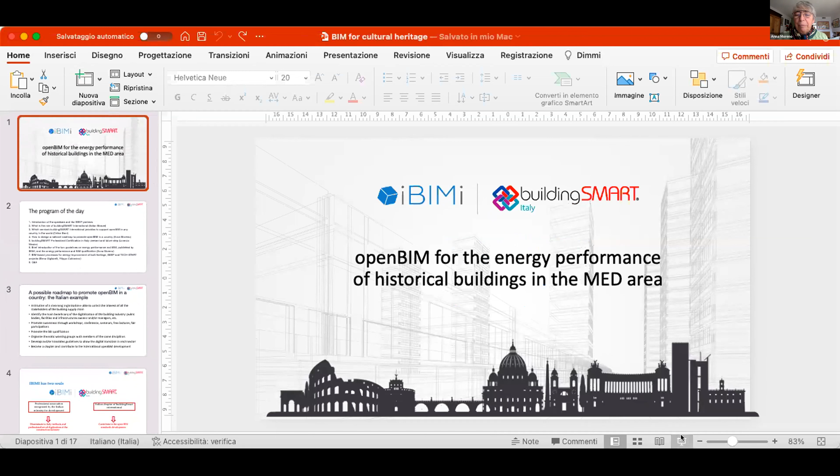This workshop is about openBIM for the energy performance of historical buildings. It's written in the Mediterranean area, but truly is for everybody. So the program of the day: first we will introduce each speaker, and then we will go to different subjects - the role of buildingSMART International, what kind of services buildingSMART is supporting, and how to design a national roadmap.

I will introduce how we did in Italy. Then Lorenzo will speak about the buildingSMART professional certification in Italy. Then again it will be me introducing two guidelines that we have produced as IBIMI. And finally, there is the presentation of a practical case within a BIP project with Elena and Filippo.

So please, let's introduce ourselves. I start with me - I am Anna Moreno, a retired researcher that started IBIMI in 2015, which is a national association of BIM professionals that became a buildingSMART chapter in 2019. Please Aidan, can you introduce yourself?

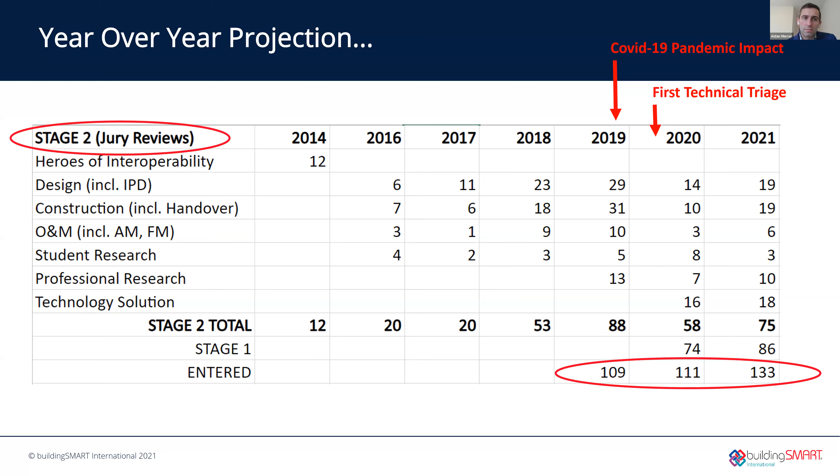2022, we had 121 submissions, and 62 of those were sent to triage. The awards program is essentially... apologies if my internet is going again, I've got another note saying it's currently unstable.

The awards program is a really great opportunity for us to reflect on the work that end users do. And from the original idea of bringing a concept such as energy performance analysis or topics around sustainability, it's important that we demonstrate that leading organizations are delivering this through open standards.

So I do hope in the future we can see some output from work like this today. It's absolutely critical that we support it and that we find this initiative and bring it forward. And hopefully in the future, we'll see some projects that reflect the very good work done here today.

So with that, I'd like to thank you for this very short update. I hope this sets the picture for the need for collaboration and working together. And I'm sorry if my internet was going in and out. I just kept getting notes saying my internet's been unstable, but I hope that sets the scene for the rest of the discussion.

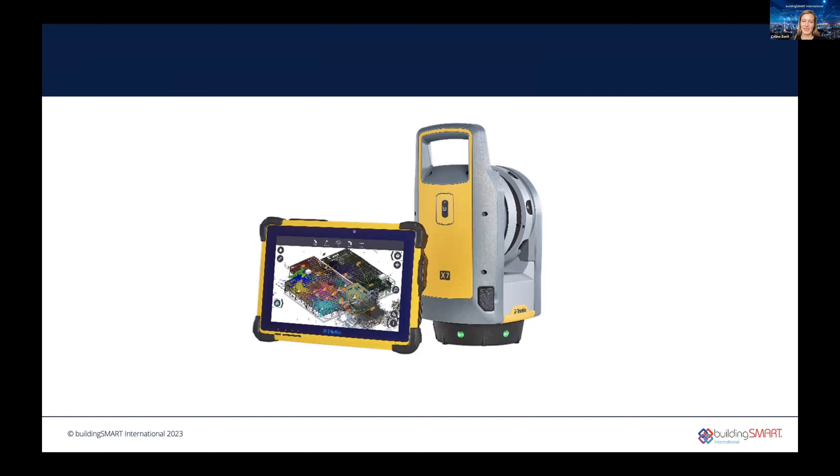This is very handy because it allows me, but also the coordination of this construction process, to use this file as a reference and to detect clashes with the design of the installations that are going to be delivered by other parties—electrical installations, etc. This is the way in which IFC files are used, and I assume that most of you are familiar with this use of IFC.

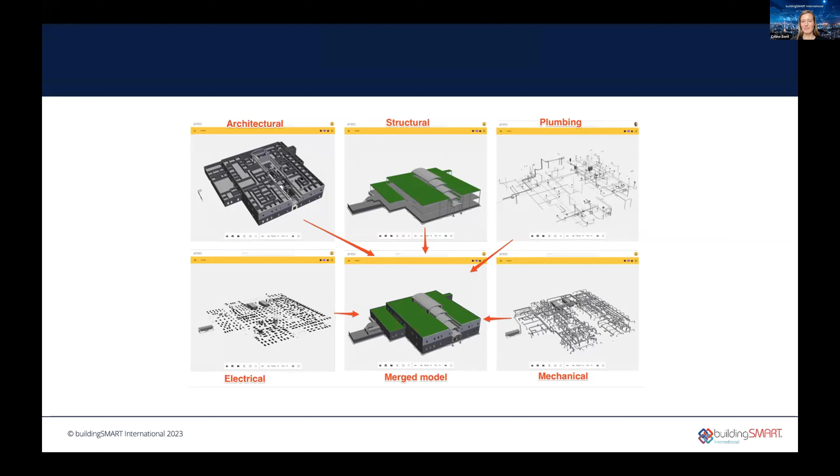But the real value in IFC is not so much in this reference coordination view by using IFC files, but it is really in the automation possibilities that it brings.

To illustrate that, I want to show an example of an energy simulation. I stole these slides from our technical director, so I'm not sure if the properties shown are correct for an energy simulation, but this is just an example.

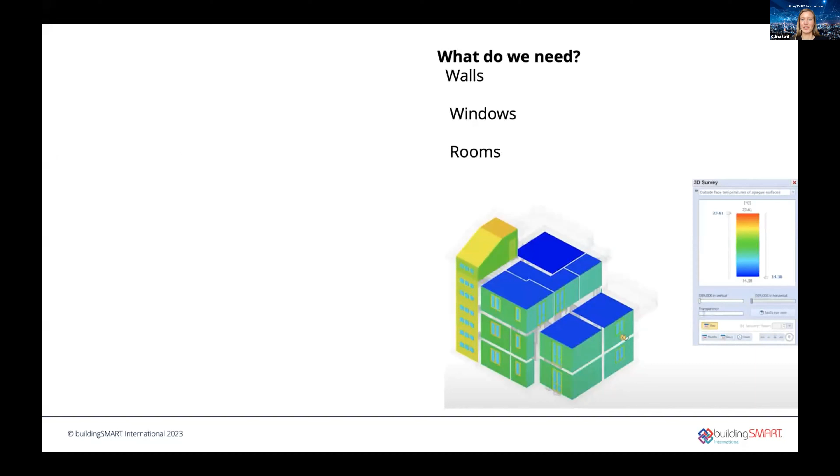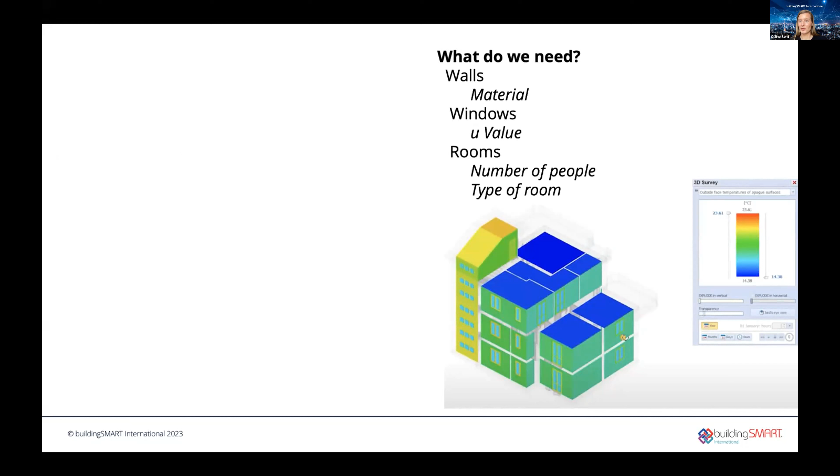If you're going to do a simulation, you need information. For the energy performance, you'll need information about the walls, the dimensions, the material, the same for the windows, and for the usage of the rooms of this building.

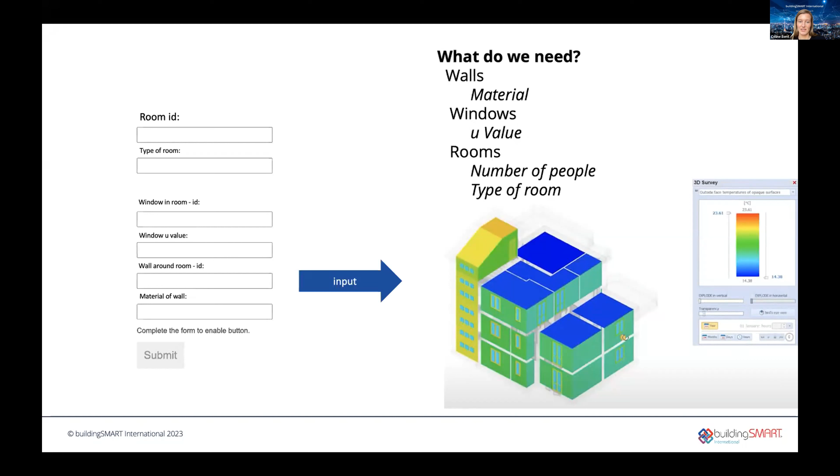The way I learned to do this type of simulation in architecture school was to fill in a form in a separate energy simulation tool, and I had to look up the different values and properties to provide the right input. The tool would then provide me with an energy simulation. This was quite a laborsome and annoying process.

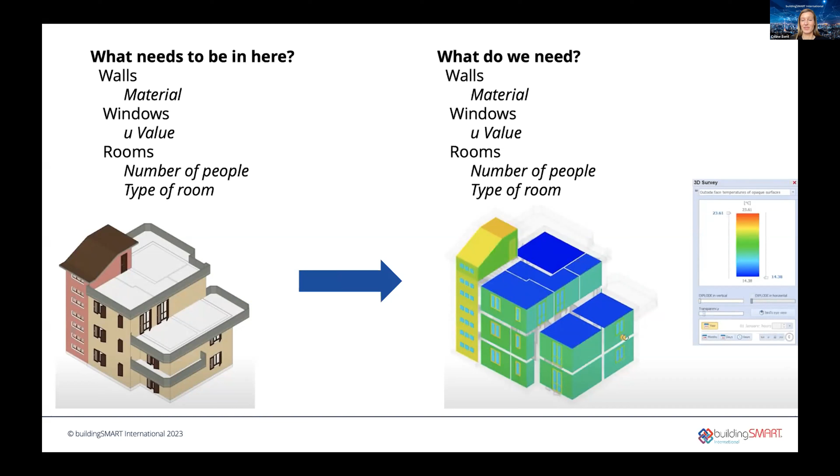Wouldn't it be handy, as we already have 3D or BIM models for the architecture and for the structural design, to import a 3D model for this simulation? We will need the same properties, the same input, to do the simulation. And the question is, how do you put that in?

This is where the sophistication of IFC comes in, because IFC really represents our agreements on the semantics of different objects that comprise a building.

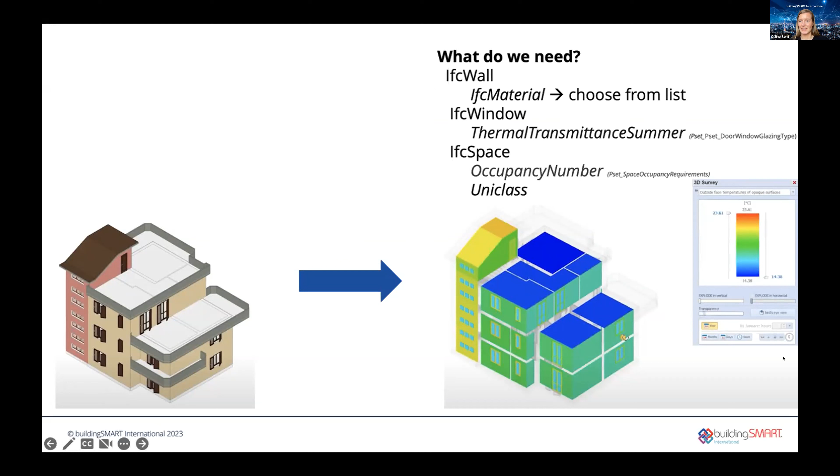For example, there are international agreements on how you call a wall and how you attach properties to that wall. If you look at the inputs for this particular energy simulation, everything written in red comes from IFC, from these industry foundation classes.

Obviously, for an energy simulation you often need certain national classifications, such as for the material of a wall. In the UK, there are very specific classifications used for energy simulations, and I can imagine the same applies to, for example, historical classification of buildings in Italy.

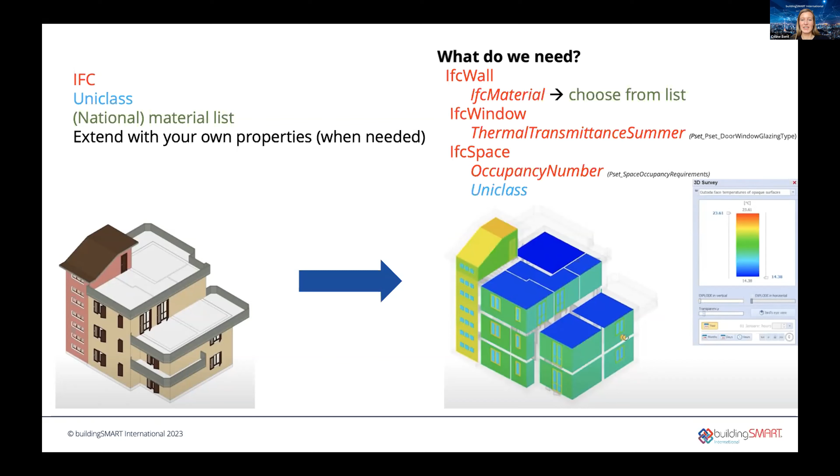So you will need to use those properties, and by using IFC you can automatically import these classifications into the simulations. Actually, software tools exist that automatically select the right specific inputs needed to do such a simulation.

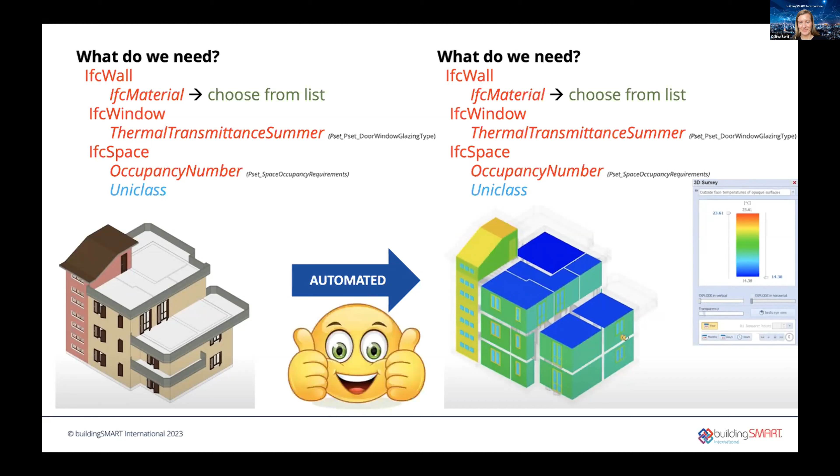This example comes from a tool implemented in a software of ACCA in Italy, but there are many others. This is really helpful, and it should make our lives much easier.

As I said, we need to use all these different classifications, and IFC is only limited. IFC really covers the basic classifications that are agreed internationally.

But buildingSMART International has developed a service where all the other existing classifications can be published, such as national classification systems in Italy. That is done in the buildingSMART data dictionary, which you can access online.

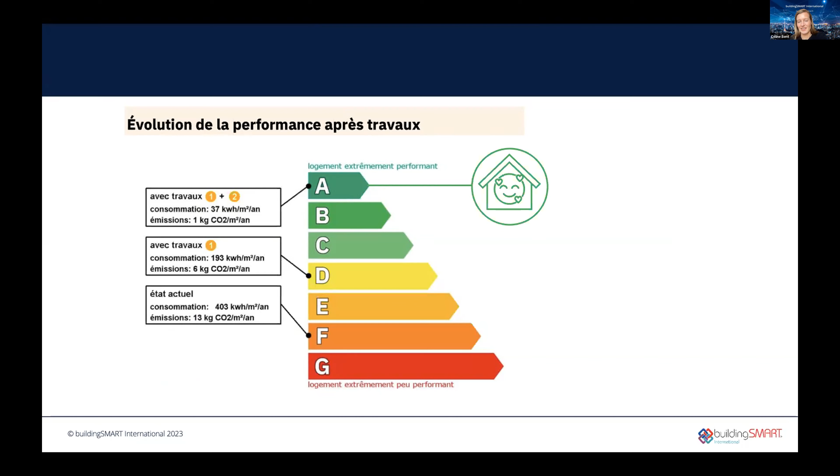But as many of you would agree, energy performance is not the only thing I find relevant in my renovation projects. For example, a very significant part of the environmental impact of a building is in the actual embodied carbon of the materials used for the renovation. Other than that, when I move into my new house, I don't want to be completely broke from the high cost of this renovation. And I also hope to move in sooner rather than later, so the time of construction is also very relevant for me.

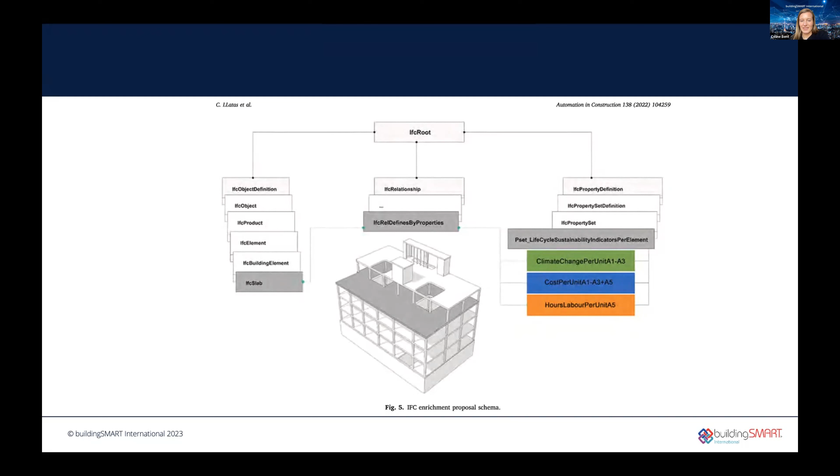On the screen you see an example of a study of different types of life cycle assessments that you can automate by using IFC. These life cycle assessments relate to the climate performance, the cost, and the local labor hours required for the job.

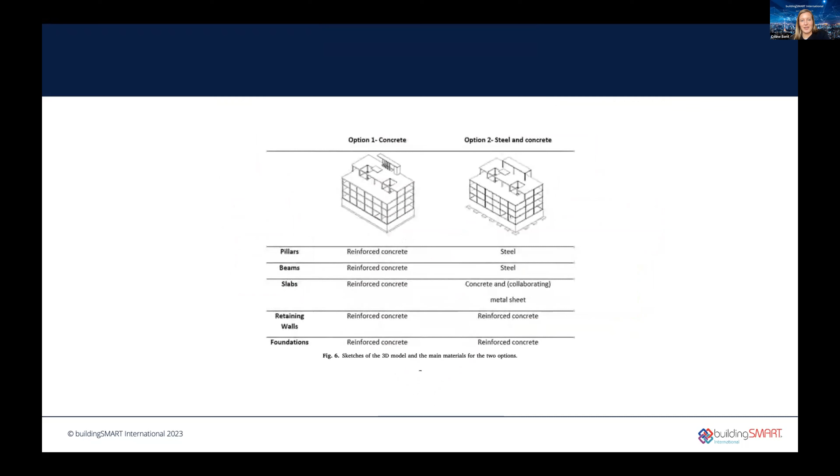In this simulation, two different design options are compared: a concrete structure and a steel and concrete structure. As an outcome, you can see that in this particular case it would be wise to choose the second option, the combination of steel and concrete, as it has the lowest cost, lowest working hours, and the lowest carbon emissions attached to it.

This is possible currently, but this is part of a research paper, so it still requires a lot of work and also a lot of specific input and knowledge, and this is obviously not desirable. It's due to the complexity of the current state of IFC.

It's really our vision that in the future, by just pressing one button, different algorithm-supported simulations can be done at the same time. And we're working on that already. We're working on simplifying IFC, and we do that in collaboration with different software vendors, so that's hopefully to come soon.

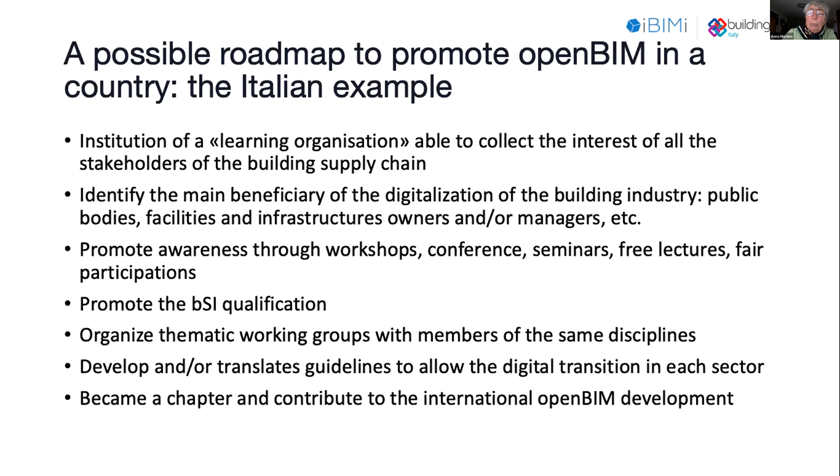So in the end, IBIMI has two different souls. The first was the professional association recognized by the Italian Ministry for Development. And then when we became the chapter, we also contributed to the openBIM standards development.

This is the increase of our members. We have three kinds of members: individual members, collective members, meaning small enterprises but also university research centers, and some main stakeholders, which now are mainly the road company and the railroad company.

Here you see some of our collective partners. On the left, many universities and research centers. In the middle, more enterprises and also some social networks for promoting the knowledge. And then we have many software houses - you see the main ones like Autodesk, ACCA software and Graphisoft, but there are many others more specific. And we also have many other big and small companies.

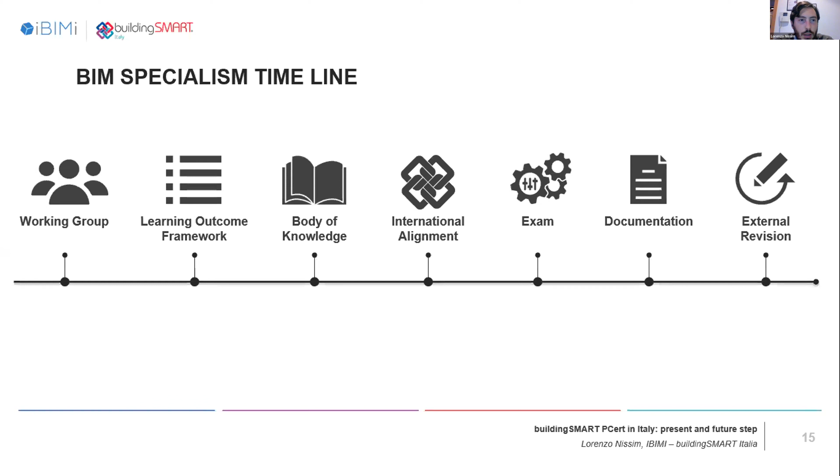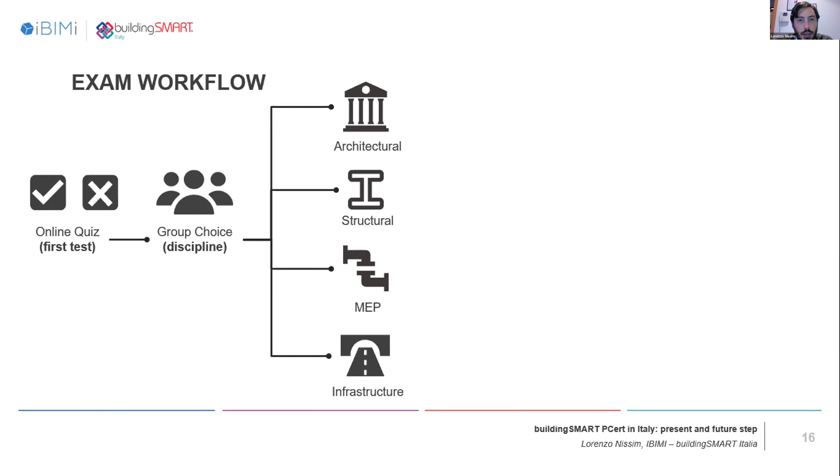So what we thought, and this will be my last slide, is that from next month we will start with the exam. A BIM author, after doing his own training with a training provider that we can suggest, will have to sit an online quiz. Then he will choose what kind of domain is the part, so architectural, structural, MEP, infrastructure. Then he will get some complex tasks, some assignments on actually authoring a model with specific organization of information, using these specific standards, and providing a final output that we will check.

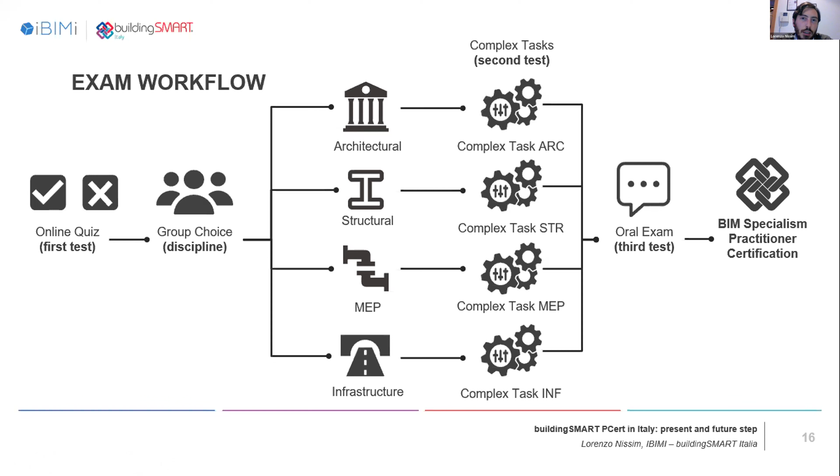And then after that, we will ask the student to sit an oral exam, where we'll ask about maybe something that went wrong in the two first exams. And after that, we will guarantee that the BIM author is able to author a model, and really knows about interoperability, how to use all the standards we mentioned before, and is able to provide the deliverables. And that's what we are doing now.

As I said, in the future there will be coordinator and manager, and other profiles will follow for sure, because there are many professionals in the BIM world. And that's it from me.

Okay, thank you, Lorenzo. So Lorenzo provided an overview on the way to ensure that we have the right professionals within our country, and so that we can really implement openBIM and digitalization. I think, okay, just stop sharing.

Okay, so now I have my second presentation, which is on the guidelines that we have developed within our working group. The working group was composed of universities or researchers, but also companies and standards experts. This will be very brief, and then if you are interested, you can download the guidelines and also look at some longer presentations. So what is the problem? I like to start in this way because, looking at Céline's presentation, she is doing what different professionals usually do.

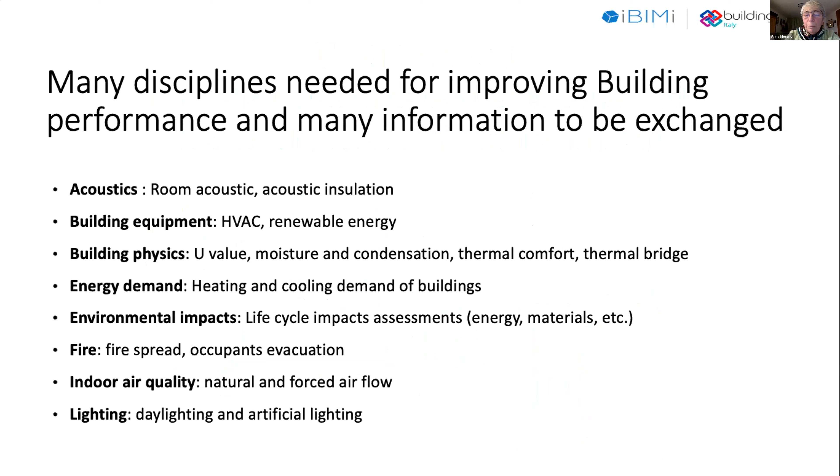So why is openBIM used? In this example we see a real building which was in my company at ENEA. You start from a point cloud and then obtain the 3D model. If you use openBIM, you can exchange the IFC file and provide it, for instance, to the mechanical engineer who can organize the conditioning plant. You can also share with someone expert in photovoltaic plants, or green walls, or building envelope. If you use IFC, even if each person has used different software, you can federate the model, and then see if there is any interference, and get the report to obtain the authorization.

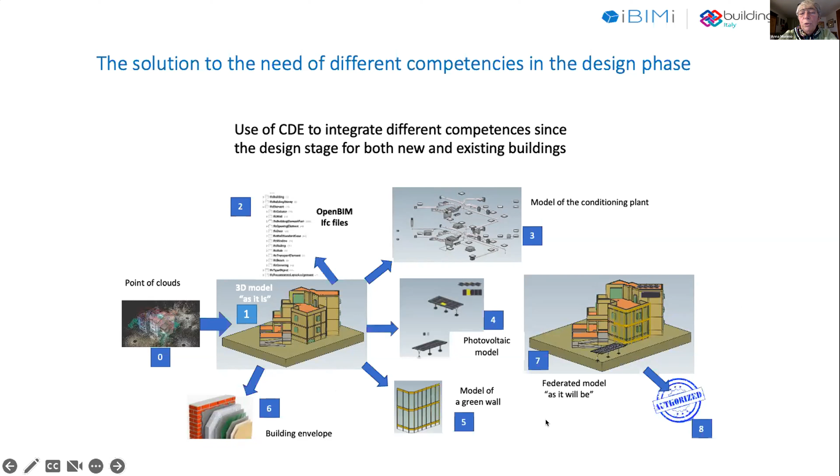This is possible today if you use IFC, because you can share the model and everyone takes only the information he needs to perform his work.

So the first guideline was related to which information needs to be exchanged, when, why, and among whom. It has considered the whole life cycle of a building, from design to maintenance—user maintenance, operational maintenance. For each phase, the people that need information are identified, and also which information they need. You can download the guideline both in Italian and in English.

Then we developed a second guideline related to historical buildings. Why? Because historical buildings live forever, while very often documents do not last forever. If they're on paper, they get lost, aren't updated, and are stored in different places. And if they're digital but not in openBIM format, you can still lose them—because after 10 years the software may not be updated anymore, and you may be unable to read the file. That's why IFC is important, not only for exchanging information, but also for storing data. For historical buildings, this is really essential.

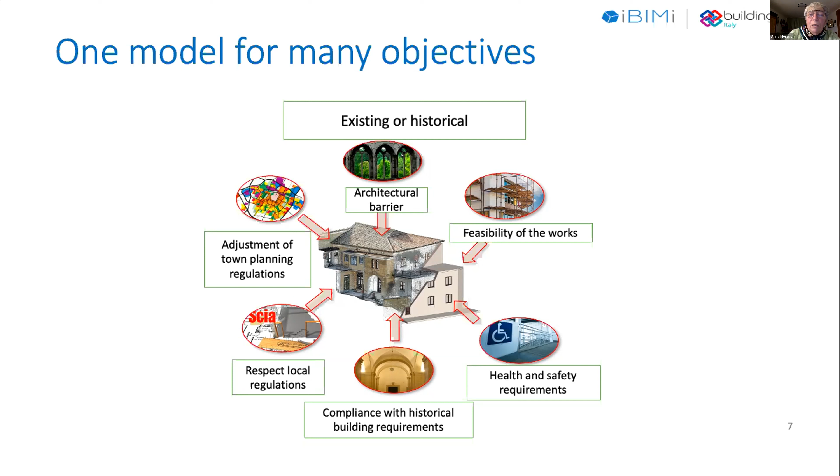Then you have health and safety requirements—usually these buildings are not at all safe, so you need to make some adjustments. And then you have historical building requirements and respect for local regulations. If you have this model, you can share it with different people in different cases. That's why it's important.

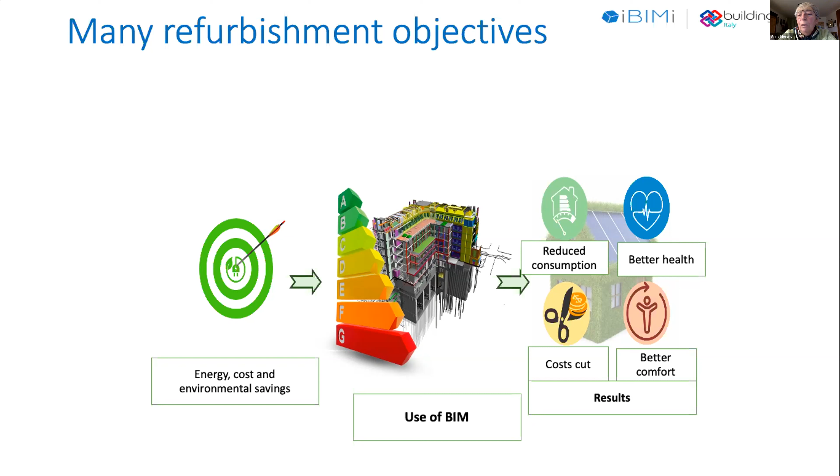And it's also important because, as Céline showed, you can really increase the energy performance of a building by acting on different technologies, also with insulation, building automation, or changing the windows. You can simulate the different interventions and evaluate the cost and the comfort.

So what you do is start with the digital relief, then add energy data related to the walls, windows, ceiling, and so on. Then you can use software to make the energy model. As Céline said, it's not straightforward to use the data from the model in an energy software, but within buildingSMART there is a group working on the model view definition for energy simulation. So you can evaluate the different scenarios and decide what will give the best return on investment.

Why is BIM methodology better than the traditional one? Because in the traditional process, we usually lose information from one stage to another. You see, these are where you lose information, because usually you have the design made by an architect, then it is given to a constructor who builds it, and then during the handover, when the building is released, usually it doesn't provide all the information that was used to construct or install the different plants. So when you need to do the refurbishment, you need to start from scratch and find all the information that was missing.

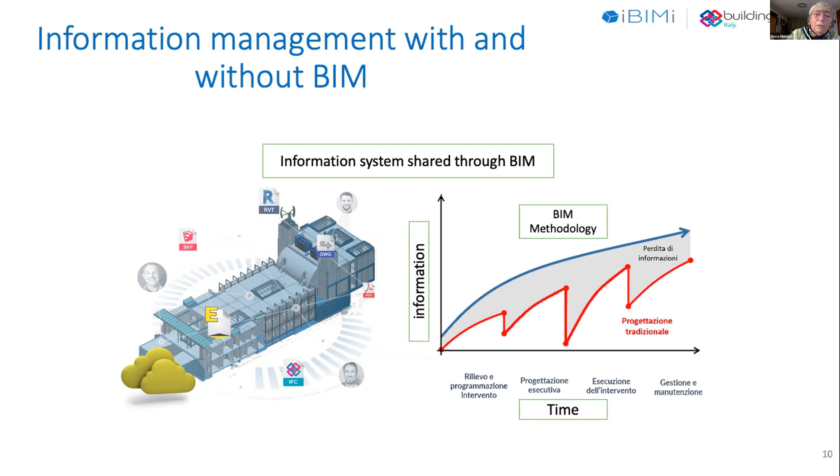While in the BIM methodology, as you start from the BIM model since the beginning, all the information that you collect during the life cycle can be linked to the BIM model through different documents, even PDF images or technical schemas, so that they are always available for anybody in the future. And for historical buildings, the time can be even centuries. So that's the importance of using standards that can be read even after 100 years.

Again, this is to show how information increases during the lifetime of the building, and how through BIM we can collect this information. This represents the traditional schema, where at each stage different people collect information in different formats and different places. While with BIM, you have a model and you add all the information during the lifetime.

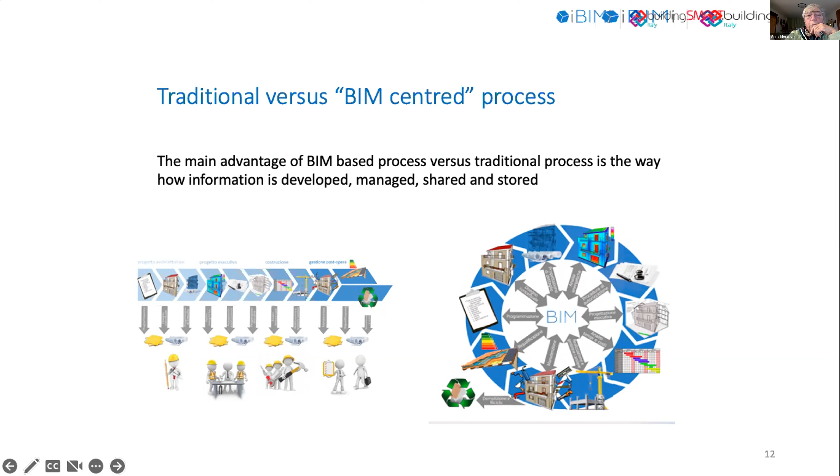As we saw through the previous presentation, IFC is the exchange data file for the model, but there are other standards for the exchange of other information. So there is not only the IFC standard, but other standards built by buildingSMART: Model View Definition, Information Delivery Manual, BIM Collaboration Format, International Framework for Dictionary, and buildingSMART Data Dictionary.

Again, we have heard many times about the life cycle cost, and we know that the cost of the building is very high, but the operational management cost is also very high. It has been demonstrated that if you can use the BIM model for managing your asset, you can decrease the cost by even 30%. That's why it's important - it's not a very high cost compared to the realization, but it's for a much longer time, and for a historical building, it's forever.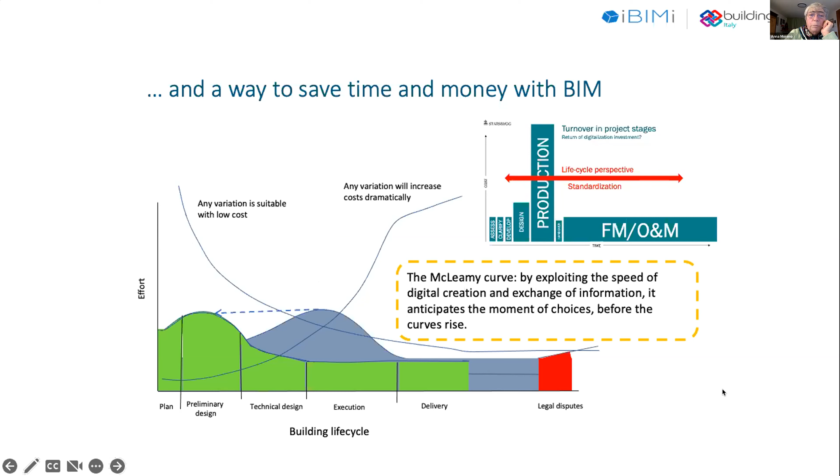And what this means, you will find in the guidelines - we have identified for each actor of the building process, which actors there are, and which information they need to exchange. These represent the exchange of information, done for each stage. This underlines what is important: that all these people discuss the preliminary design here at the beginning.

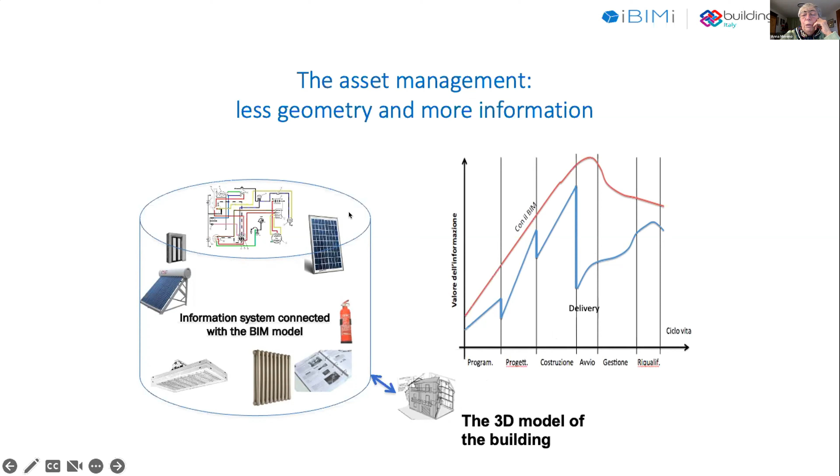Now we have spoken a lot about the 3D model, but during the use of the building, the 3D model becomes only the container for all the information that needs to be accessible to the owner or facility manager in order to keep the cost under control. Again, this is the same curve as before. This represents the database linked to the building, covering this drop of information in the curve. The main concept is that in the beginning, geometry is very important and data very little, while during maintenance, data are much more important than geometry.

So when Lorenzo said that there are other professional figures that we will develop, because there are others needed later in the process, not only the BIM specialist or BIM coordinator.

This again is just one row of a big table that you will find in the guideline, representing a way to make decisions. For historical buildings, usually you do not have a trustful architectural project, and if it exists, you need to make sure it's equal to the real building.

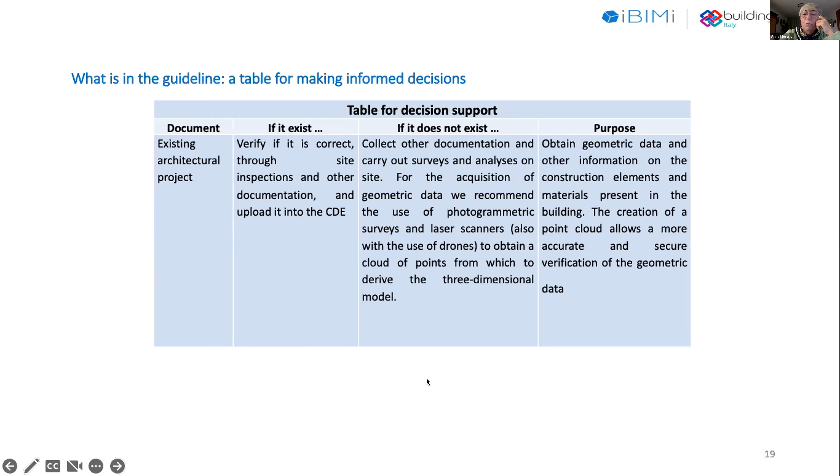I'll give an insight into another activity we are running. Usually, at least in Italy, but also in Europe, we have many small enterprises working in this field, and for them qualification or certification is a high cost, so usually they do not look for certification. But at the same time, especially in operational management, you need only to ensure that the company has the capacity of performing specific tasks.

So we have developed a project with a platform that will allow different workers or designers to demonstrate that they have specific competence to achieve specific tasks. This is the link to the ARISE website, where we are already publishing some reports, and we will develop this platform further.

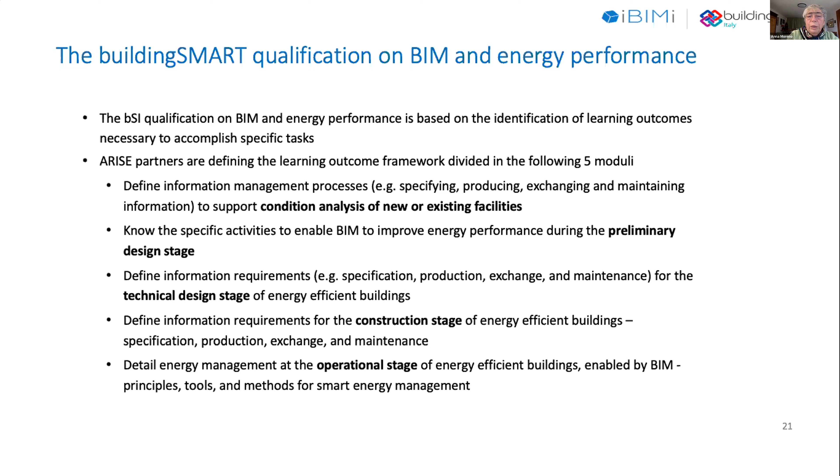I'll go through this quickly. Again, as part of the ARISE project, we have developed another body of knowledge specific for BIM and energy efficiency. It's not yet ready, we are still reviewing it, but I hope in a few months it will be available, like the other qualification we are already running.

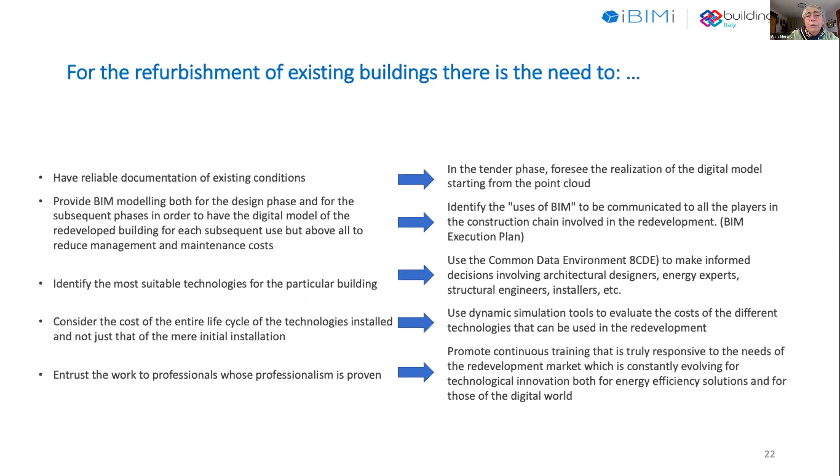I prefer to stop here. What's important is to understand that we really need to do something if we want the digital revolution of the building industry to take place. The traditional building industry is very costly, not very effective, and not environmentally friendly, so we need to change. Everybody agrees we need to change because of climate change and the rising cost of energy.

But to do that, each of us has to change, and when it comes to changing ourselves, it's normal there is an attempt to keep things as they are now. I fight every day with workers refurbishing my historical house in Naples, because they're used to doing that activity the same way for 10, 20 years and they don't want to change. But I think people are now more ready to change.

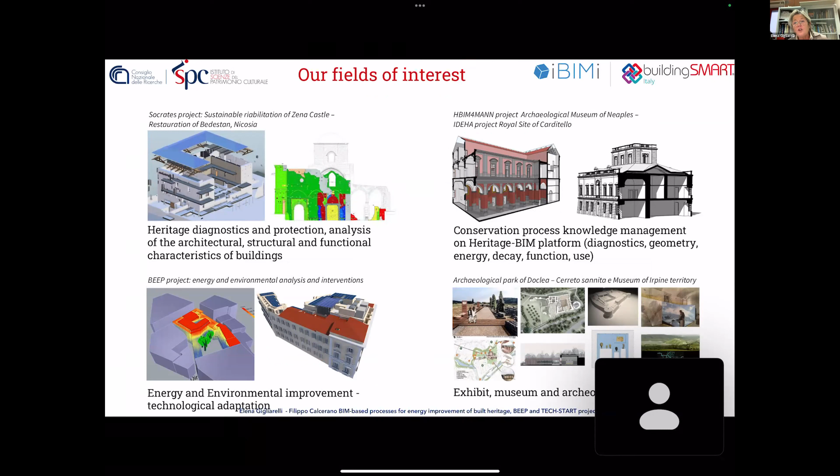These are the main areas of intervention of the laboratory, ranging from diagnostics and protection analysis to conservation process knowledge management, but also energy and environmental improvement, and museum and archaeological site design.

The main topics we will talk about in the first part are the definition of energy efficiency in the built heritage context, the challenges of the project, the Italian case study, the main results of the project, and a quick overview of our work at the urban scale.

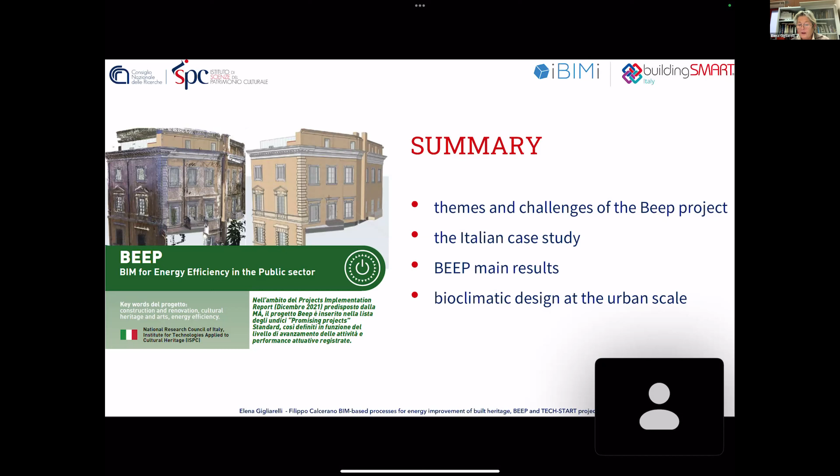Let's start with a quick overview of the BEEP project, in particular the role that built cultural heritage can play in making the Green Deal a success by investing in innovation, greening and circularity of the sector, and by learning from traditional knowledge how to achieve resource and energy efficiency by sourcing locally, as highlighted also by the European Heritage Green Paper.

The project was financed by the ENI CBC MED program, the largest cross-border cooperation initiative implemented under the European Neighborhood Instrument, whose objectives are the consolidation of neighborhood relationships by enhancing social and economic development, also through addressing environmental challenges, which is one of the priorities of the program and of the BEEP project.

The consortium is made up of 8 partners from 7 countries: Italy, Cyprus, Lebanon, Palestine, Egypt, and Jordan. In this way, we could test this emerging technology in different Mediterranean countries to demonstrate its scalability to the entire building stock of the Med area.

Our project tackles 5 main issues and challenges. The leading theme is the energy efficiency of historic and public heritage through the use of strong digitalization of design and decision support tools, which is the link between fighting climate change and protecting cultural and natural heritage.

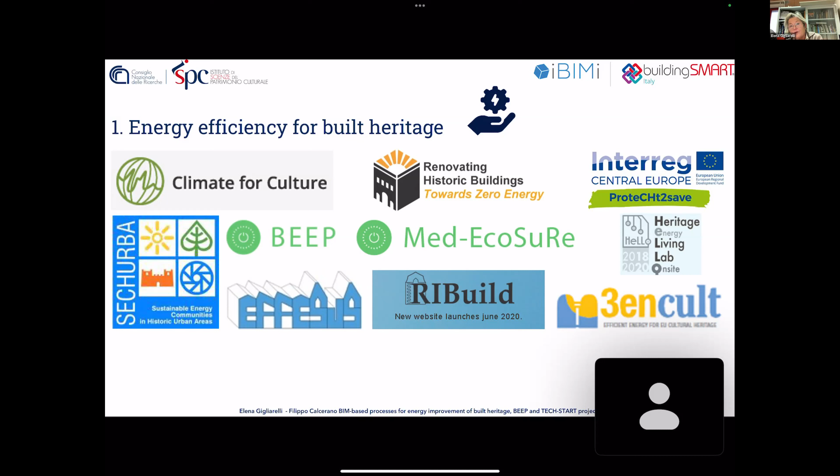We became a member. It was only in 2003 that the European Commission made its first call for research proposals to study the impact of climate change on cultural heritage. The potential for this type of study, however, is very high, especially in Europe, with a flourishing research line on this integration, historically articulated first in the direction of risk assessment, and more recently also in terms of adaptation and mitigation.

The European group strengthening cultural heritage resilience to climate change, established in January 2021, presented a report very important for us. In this report, there is a specific chapter devoted to research and innovation, and what are the research needs for basic and applied research in the future.

The report underlines the need to carry out more in-depth studies on the behavior of historical materials, and to invest in studies based on modeling and simulation, in order to introduce more modeling and simulation tools on how materials behave in times of climate change. The report also underlines the need to invest in studies on the compatibility of adaptation measures with cultural heritage guidelines, looking at how innovative materials behave through modeling and simulation tools.

So why the choice of BIM? Most of the previous panelists have explained so well the motivation, the choice of BIM. In our idea, BIM is the acronym of Building Information Modeling.

It is based on the creation and updating of an information system, combining geometrical and semantic information, associating the 3D representation of the building elements with a dynamic and implementable database. This heritage conservation is based on a multidisciplinary decision-making process that required a structured organization of historical, diagnostic, and documentation information.

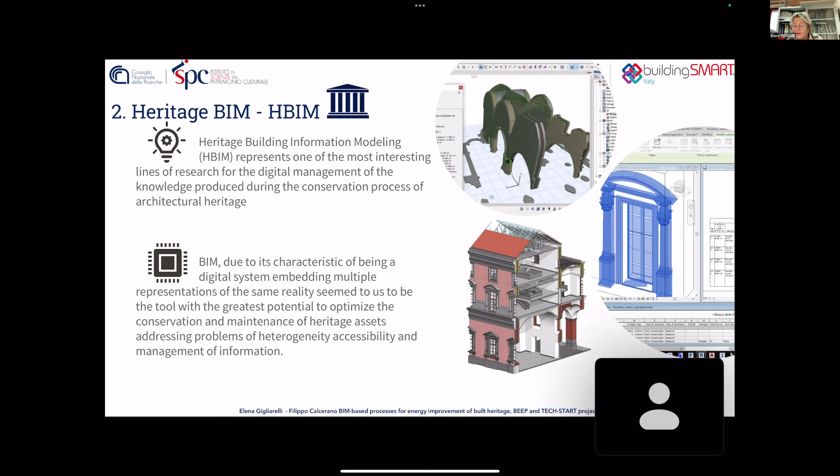A BIM process of historical building, heritage BIM, combines in a centralized system the management and production of information for design and maintenance activities, ensuring the permanence, the consultation, the implementation of the data, and they are accessible by experts from different disciplines.

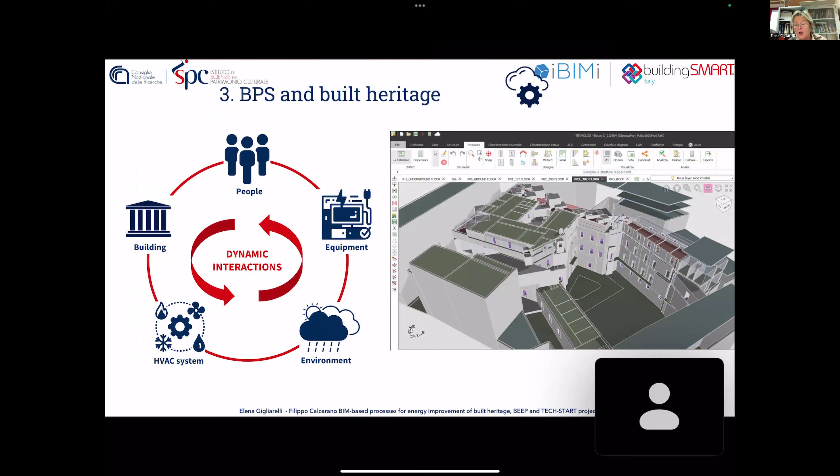Then we come to the building performance simulation. They allow the study and optimization of energy performance in an interrelated way through the creation of a behavioral model of historical manufacture and all these components: the envelope, the technical building system, the occupant behavior.

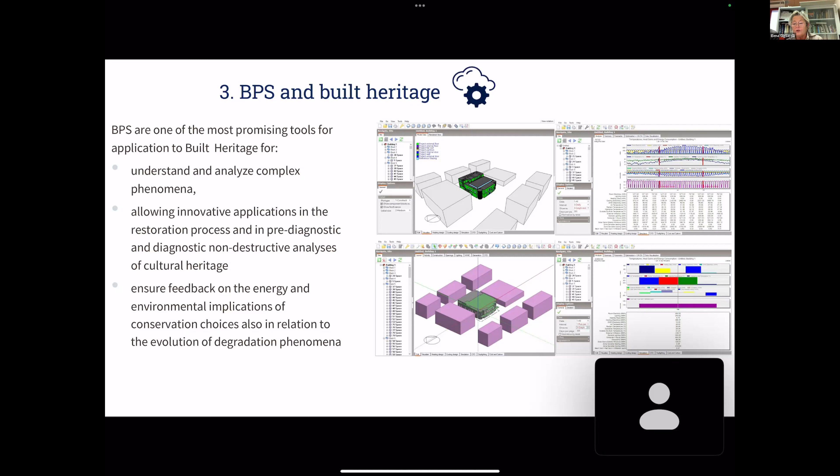Like BIM, building performance simulation involves a simulative approach, but in a different way. Numerical simulation can be attributed to the category of non-destructive analysis and are particularly interesting tools to support the conservation process of historical buildings.

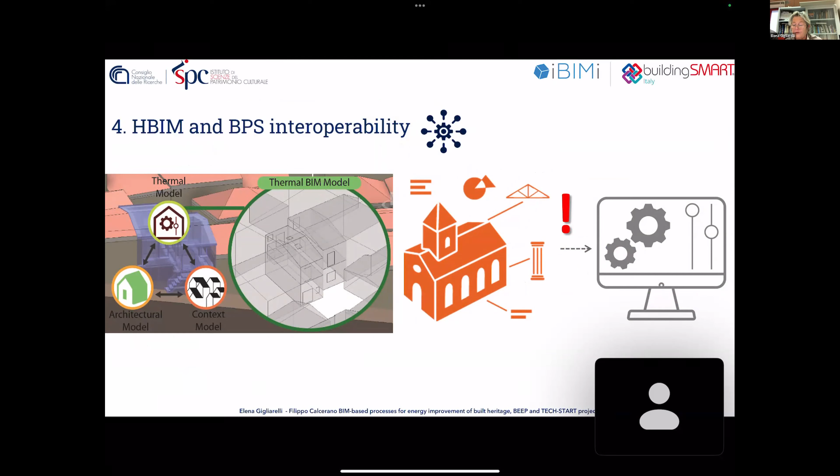The fourth theme is that of interoperability between the two simulation environments of HBIM and BPS. Although the HBIM model already contains a large part of the data required for simulation and interoperability, saving time and cost by reducing the risk of errors, the data transfer is still not very efficient, especially on historical buildings.

With the BEEP consortium, we performed a feasibility study on the interoperability between the different software. Each partner has chosen a different combination depending on the context of the country, the regulation point of view, and the knowledge and the skill that they have.

This diagram represents the workflow of the BEEP project. It underlines the centrality of the HBIM platform for a series of surveys, analysis, and simulations that are necessary to develop design solutions. The interoperability relies on a semi-automatic approach, which, thanks to the possibility of human intervention, is more reliable than the fully automated ones.

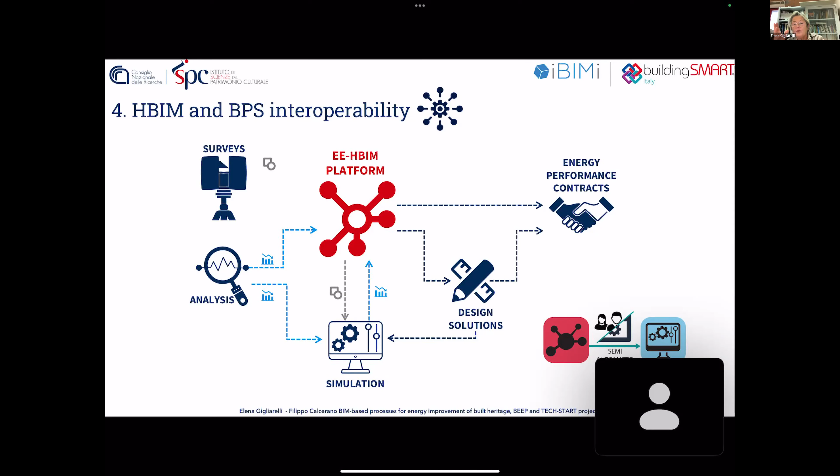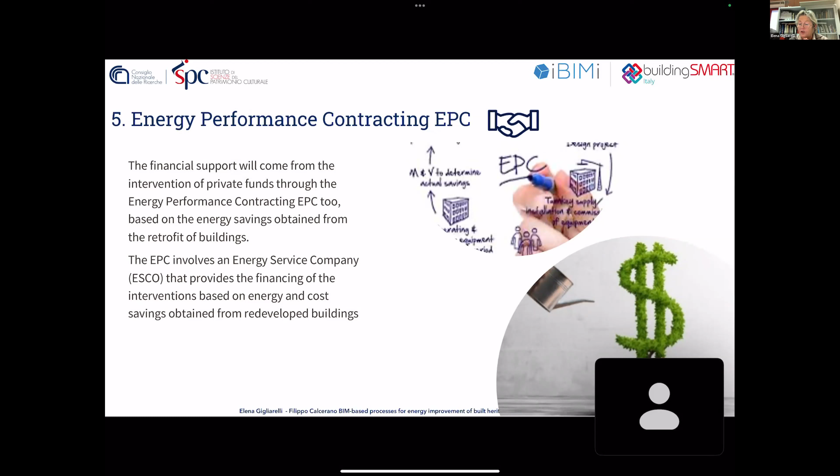Lastly, the project provides a very interesting tool for the public administration, a powerful financial support for the sensitive retrofit of public historical buildings: the energy performance contracting, that involves energy service companies, which are private companies, based on the energy and cost saving obtained by redeveloping buildings.

The Italian case study in Rome is Palazzo Maffei Borghese, a listed building in the historic and Renaissance center of Rome. It is owned by the state property agency, and currently it is headquarters of the Legal Council of the State Attorney's Office.

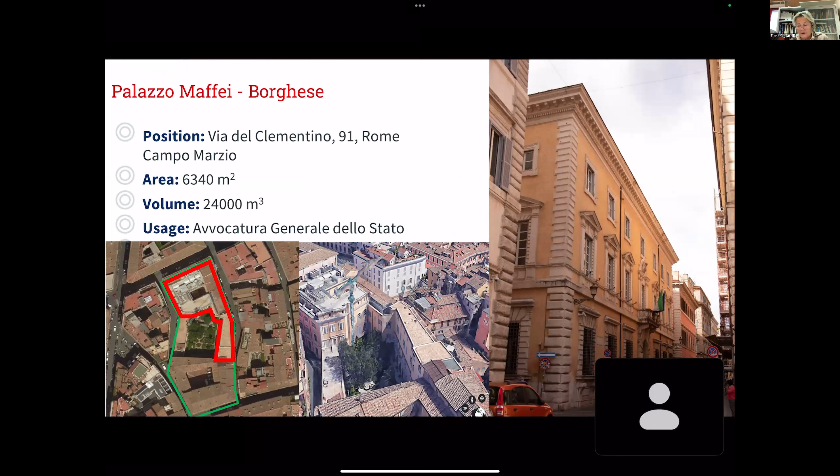The first activities regarded, as usual, the historical and architectural analysis, essential for the knowledge of the building. It is also a starting point for other in-depth analysis such as energy, environment, and conservation state.

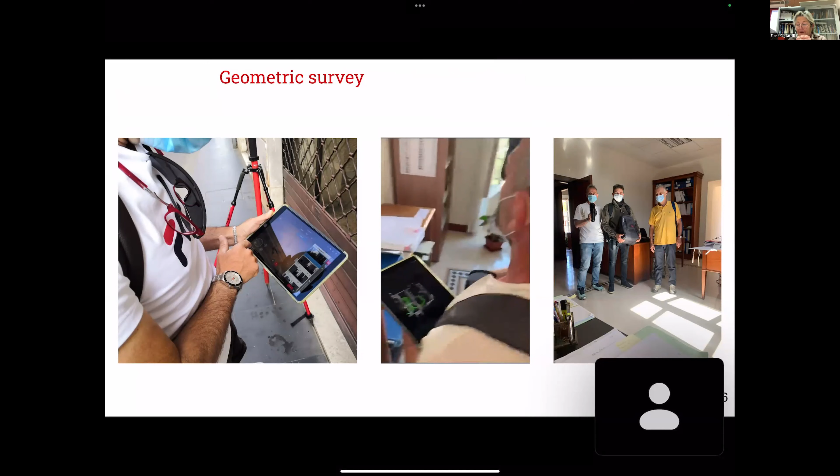The geometrical survey of the building was created by integrating different technologies. For outdoors, we used the laser scanner and photogrammetry. And for the indoors, the SLAM technology, simultaneous localization and mapping, that is particularly suitable for the survey of interiors of a large building structure due to the rapidity of the acquisition.

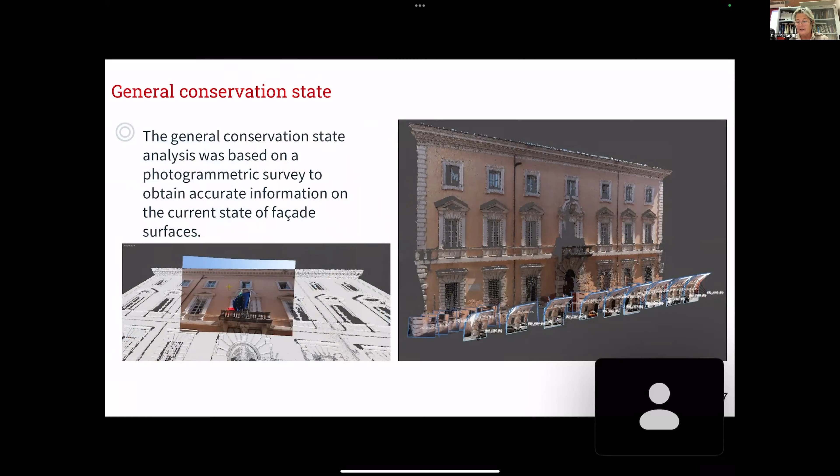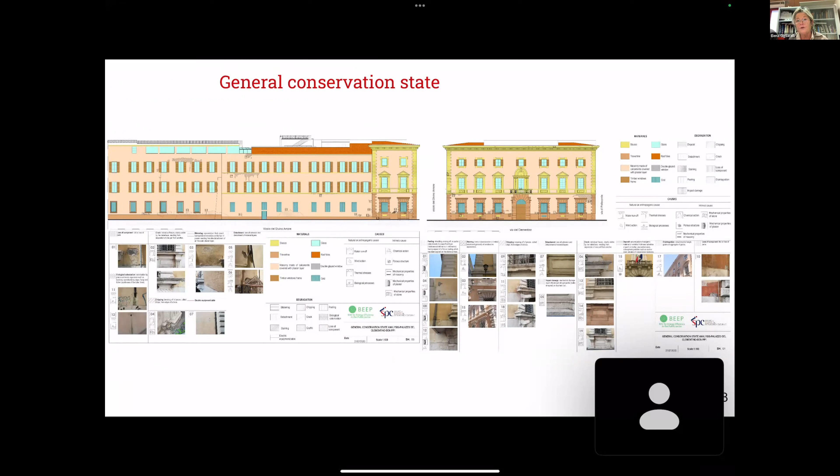The general conservation state analysis was based on a photogrammetric survey to obtain accurate information of the current state of the facade surfaces. Here you can see the representation in thematic maps. The knowledge of the damaged construction elements was fundamental for the design of the energy improvement interventions.

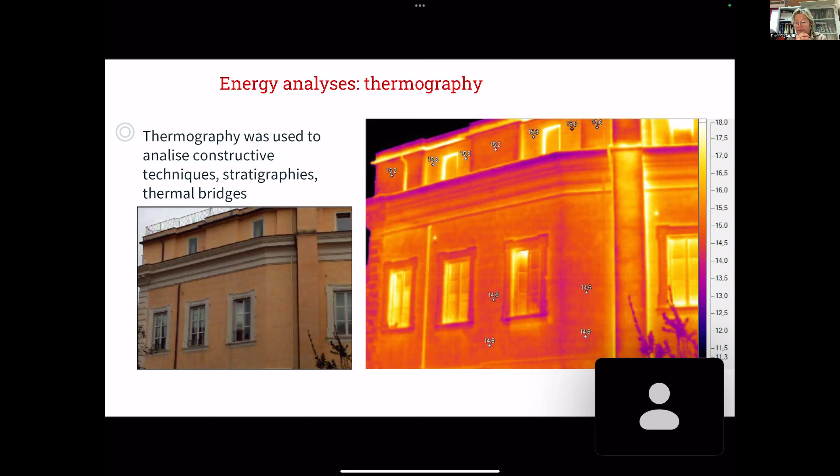Then we performed a set of energy and environmental analysis. Infrared thermography combined with the study of traditional construction materials was used to support and validate the overall understanding of the construction systems and to support subsequent analysis.

Like heat flux meter analysis, which made it possible to identify in depth the thermophysical characteristics of the envelope. Moreover, for an optimized planning of the positioning of the measurement points, we performed an additional simulation of the sunshine hours of the building during the winter months.

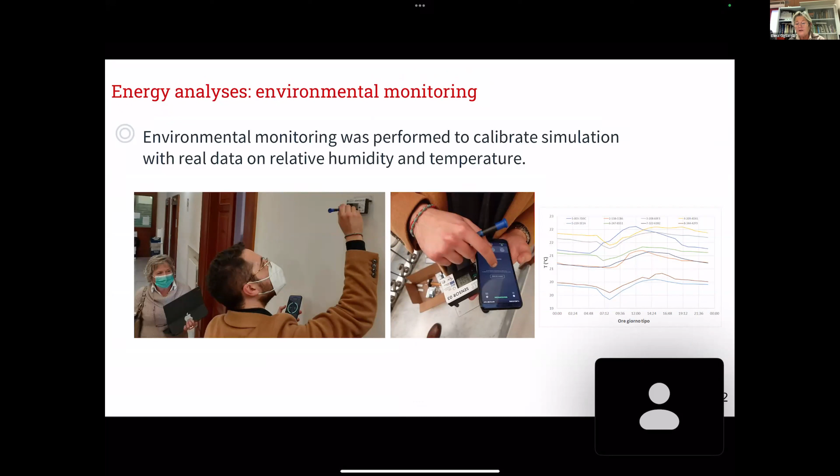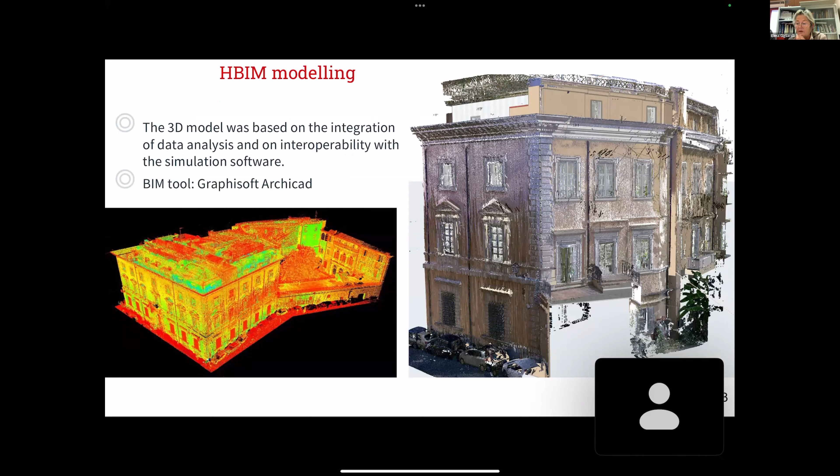At the same time, we also carried out analysis for monitoring and characterizing the indoor microclimate, providing useful data for the calibration of the building dynamic simulation model. The next step was the creation of the energy efficiency heritage building information model, a centralized repository to optimize the management of the large amount of information deriving from the analysis and simulation processes.

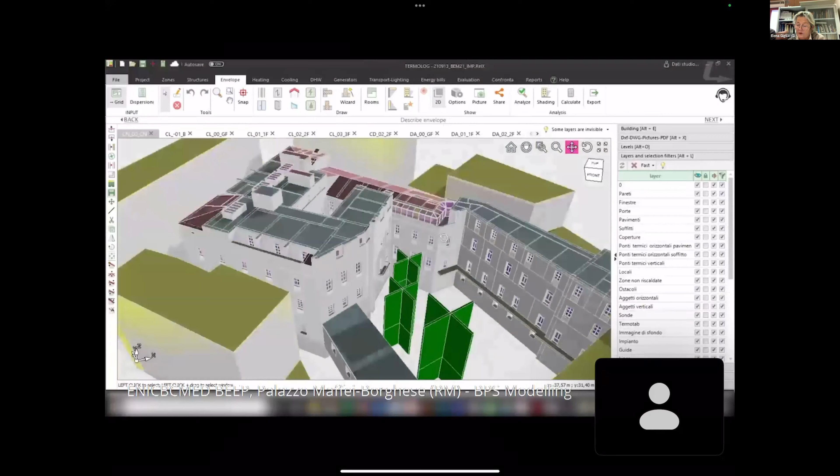This video shows the BIM to BPS process applied to the energy environmental improvement of the building. The BIM model is exported into IFC open format, verified, and then imported into the simulation software, where the final post-processing was performed.

The calculation method chosen for the Italian case study was dynamic, a choice that is very important in case of historical buildings in Mediterranean areas, as it allows taking into account the complex behavior of built heritage, for example the massive behavior, and better address summer conditions in general.

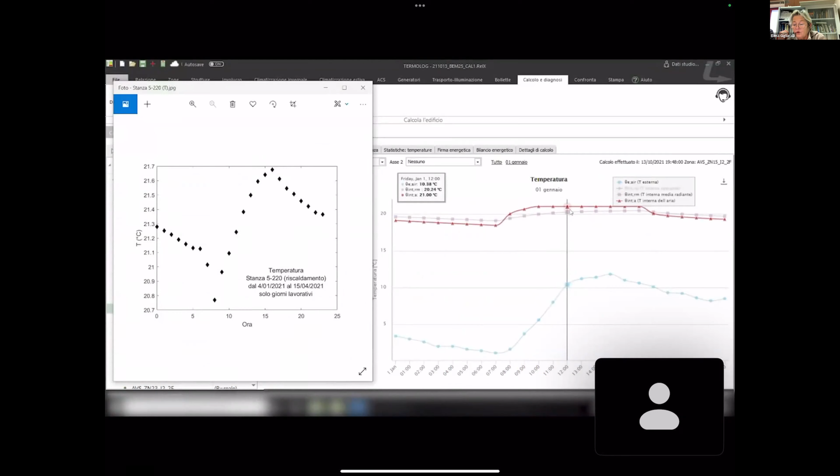The software chosen is Termolog, as it was one of the first in Italy to fully integrate the simplified dynamic calculation method.

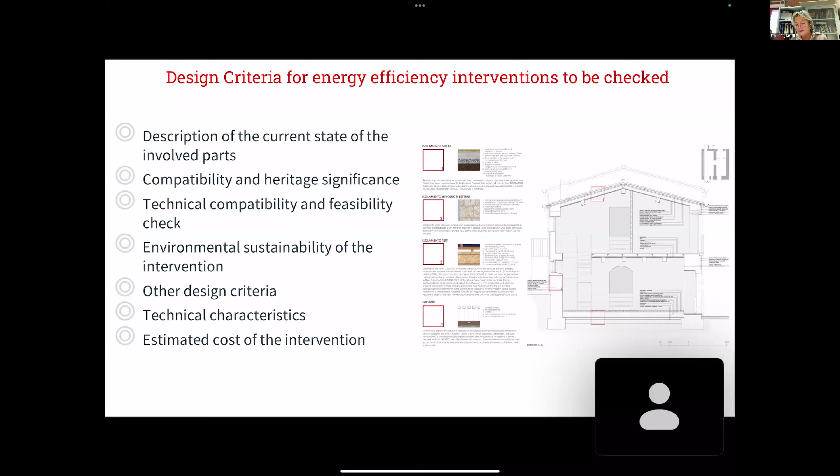The results of this analysis and simulation led to the definition of a performance-based design workflow that considers the main criteria of compatibility, efficiency, and economic and environmental sustainability, in order to obtain the most efficient retrofit solutions. For all the proposed solutions, we applied this sequence of evaluation criteria that you can read on the left.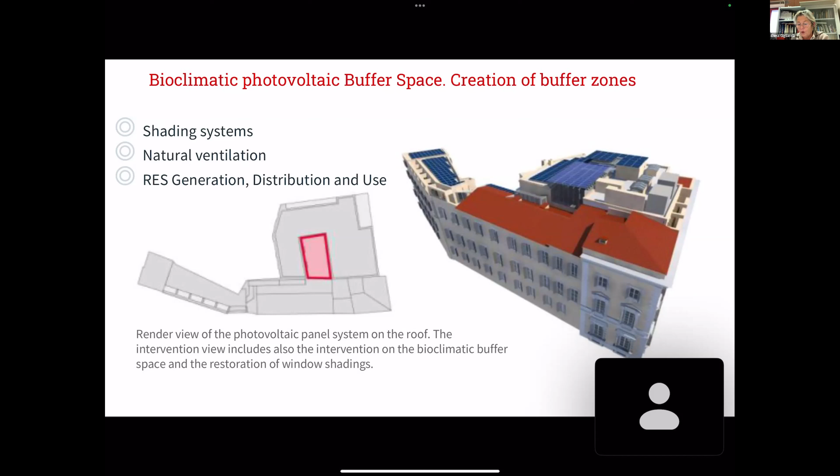One of the main solutions chosen, I will not show all the solutions that we performed, is the bioclimatic photovoltaic buffer space created in the internal cloister of the building, which involves also the creation of a shading system with natural ventilation and renewable energy generation, distribution and use. This solution was first evaluated from a technical and financial point of view in this first simple model.

This is the solution ante operam. The intervention is fully removable and does not permanently alter the building. The idea is to create a buffer space to enhance the seasonal behavior of the building and use these resulting areas that are now abandoned.

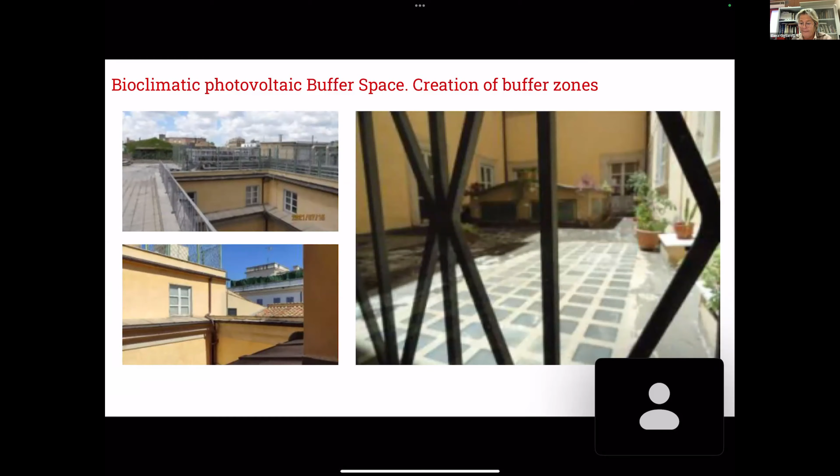Then we developed a deeper analysis verifying its compatibility with the historical value of the building and with the existing constituent material.

The roof recalls the historical traditional vault system with four laminated wooden arches, structural elements more compatible with historic architectural complexes, while making the restoration work easily recognizable. The design choice of laminated wood was made based on the experience of the designer in seismic areas, as the bandstand of Cyprus.

The project now is close to its end. No, it has actually been closed on December. We obtained an important achievement, just to mention some of the most important.

We have developed the EPC, energy performance contracting, as a methodology that addresses one of the main issues related to the renovation of public buildings: the difficulty of accessing funds. Thanks to the public administrations, building owners and managers will now have support in EPC based on a renovation project, facilitating the involvement of ESCOs in the process and the implementation of interventions.

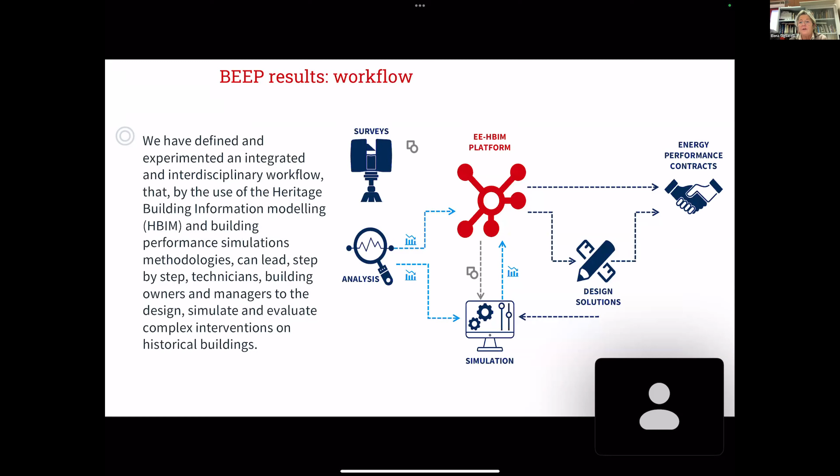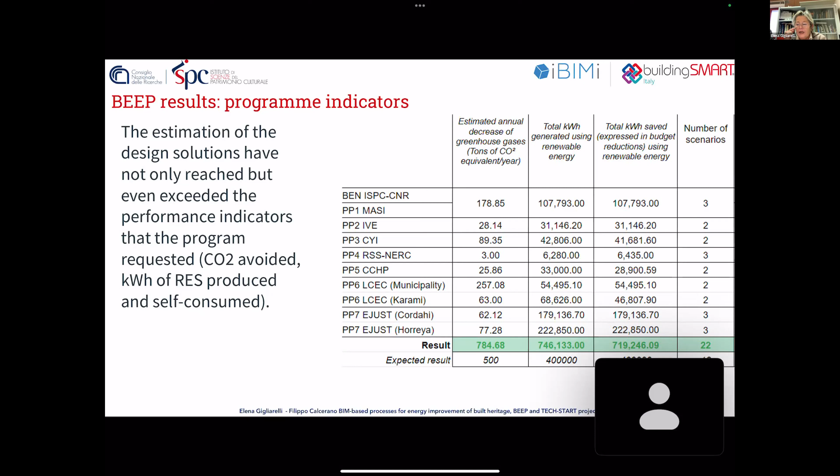We have defined an experimental integrated interdisciplinary workflow that, through the use of heritage building information modeling and building performance simulation methodology, can lead technicians, building owners and managers step by step to design, simulate and evaluate complex interventions in historical buildings. The design solutions have not only reached but even exceeded the performance indicators that the program requires, in terms of carbon dioxide avoided and kilowatt-hours of renewables produced and consumed.

We tested this workflow in 9 public historic buildings in 7 different Mediterranean countries with different regulations, climate contexts, historical building typologies, and market maturity, thus demonstrating the reliability and flexibility of the process in the most diverse contexts.

The project achieved the first BIM-based implementation of this kind and the first BIM execution plan in Jordan, and it streamlined the adoption of energy efficiency regulation in the AEC sector in Lebanon.

The preprints of the project guidelines to apply the workflow were published in Zenodo, an open access repository developed by the European Open Science program, where preprints, software, documents and articles can be shared and acquired with a digital object identifier, DOI, with which they are traceable and citable.

And we have recently published the guidelines that will act as a handbook supporting stakeholders throughout the analysis and design steps, in progressive level of detail, according to the data available in the building, its complexity and the resources available.

Also useful insights tested and contextualized in our 9 case studies. Public administrations of the Mediterranean area are already making use of the results, from the region of Valencia to the municipality of Nicosia. We will share the link to these guidelines.

The project experts were involved in the expert team defining BIM to BPS interoperability and HBIM processes at national and international levels, with buildingSMART International and IBIMI involvement.

So just a few words to close this first part of the presentation. Cultural heritage is threatened by climate change at an unexpected speed and scale. That means we need to invest in and protect cultural heritage from climate change, but at the same time, cultural heritage offers solutions and inspiration to solve the climate crisis, for example, by the use of traditional construction materials and by readapting traditional buildings to modern needs.

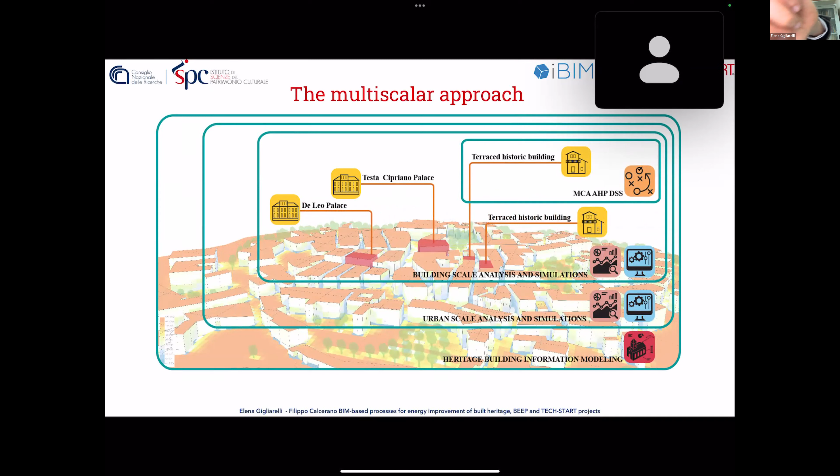In principle, all intervention on the urban fabric must implement a multiscalar decision support approach, and this is even more crucial for built heritage. The main urban design factors affecting microclimate for climate mitigation and adaptation purposes are urban geometry, urban materials, and natural elements like vegetation and water.

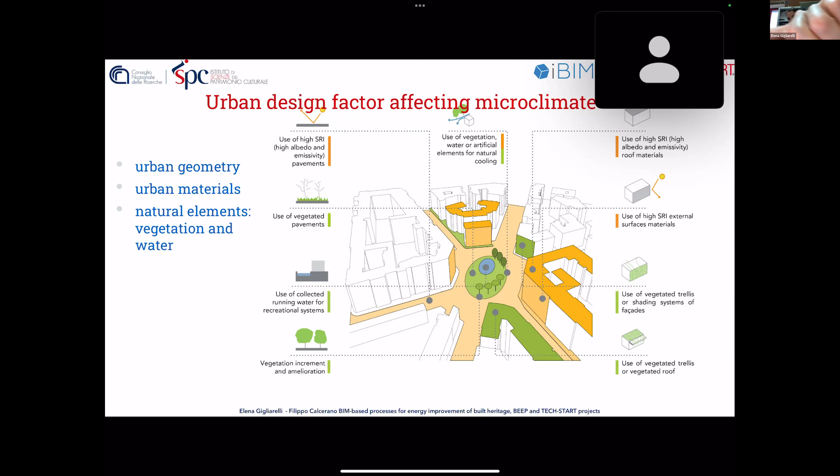One example we are working on with our colleagues from the University of Ferrara is the project TECH-START, dealing with the environmental study of the passive potential of transition spaces—what we could call the liminal spaces of historic buildings, such as porticos, loggias, courtyards, patios, and galleries.

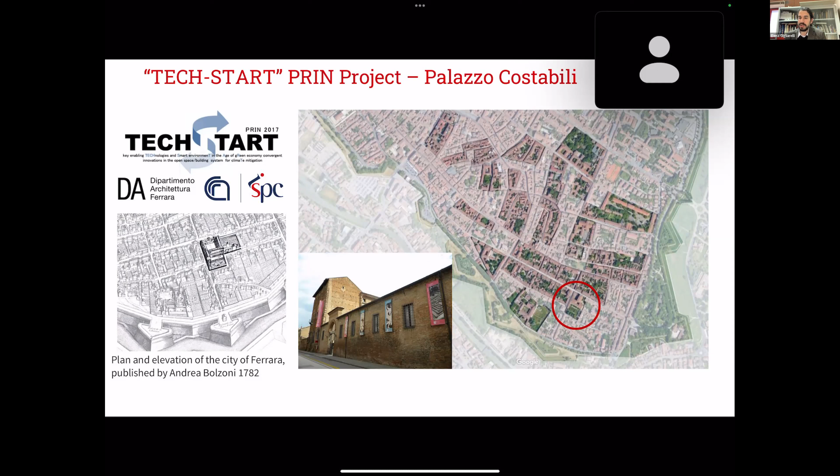There is a lot of building information modeling approach in this study too, as it helps us manage how we collect, store, and then use this data, how we develop the model and simulate it, all to propose environmental and energy improvement strategies whose effects are measurable in terms of efficiency, cost, and effects on the urban context.

The case study is the city center of Ferrara, with a very specific historical morphology based on courtyards. Palazzo Costabili, one of Biagio Rossetti's major 16th century works, was chosen as the pilot case study because it was built as part of the renovation of the medieval aggregate of Ferrara, and it features a wide variety of typological and spatial configurations of liminal spaces, of which the urban fabric of Ferrara is particularly rich.

The BIM-based interoperability approach here helped us first draft the shared knowledge framework among experts, then plan the data flow, and then develop the whole process through trial and error—from data collection, data export, file check, and so on.

Here we can see the model in Rhinoceros after the first import from GIS-edited data. Then we acquired the point cloud within this first model, and then developed the simplified model for simulation purposes in this case.

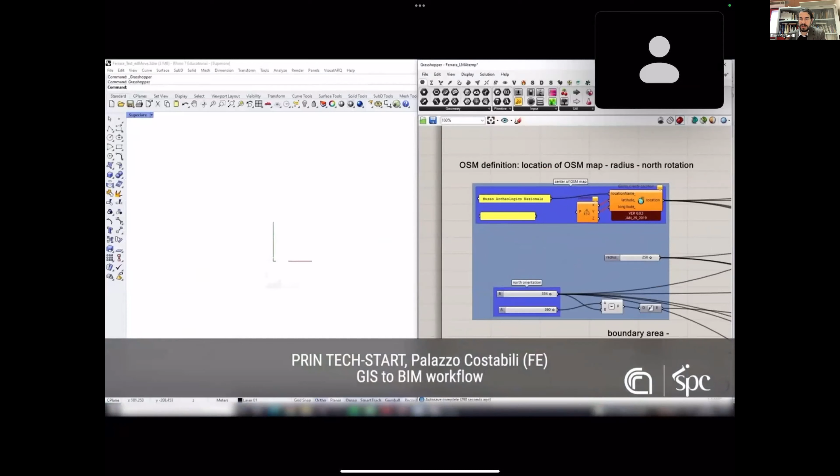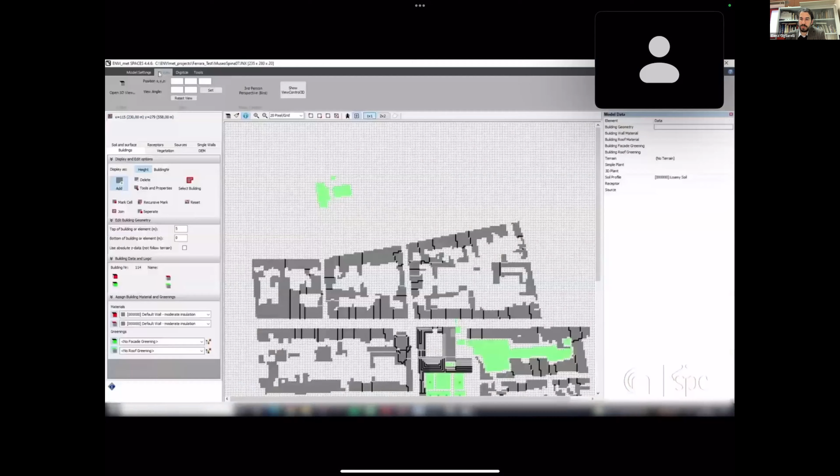Here you can see how the model of the building and its context was developed, integrating GIS, photogrammetry, and land surveys. Environmental monitoring of key spaces was carried out and then used as a starting point for the subsequent microclimate computational fluid dynamics simulation, used to evaluate intervention proposals for the energy and environmental improvement of liminal spaces, scaling these findings to the surrounding urban fabric as well.

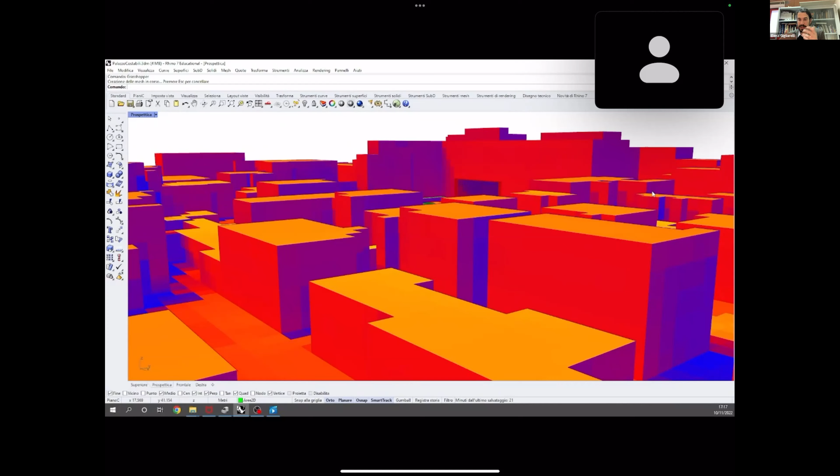All the steps were integrated into what you are seeing—this semi-automatic pipeline, according to specific algorithms using visual programming language, which allowed a dialogue between different applications, reducing parallel modeling steps and the risk of manual error, as Anna was speaking about before. So this goes all the way up to the final representation of the analyzed data.

That was more quick—just to give you a quick overview of this other project. Thank you, thank you very much.

Thank you, Filippo and Elena. I think it's really evident the amount of work that is behind these projects.

What I am trying to do now is set up a new working group within IBIMI, because there is really a lot of activity going on in universities and research centers on historical buildings, and I think it's very good to share this knowledge and methodology to develop it within an international community. So we are now looking for sponsors so that we can fund some young researchers in doing this work.

So now we are open for questions. I don't know how it works—if anyone can speak, or if people can write in the chat. I don't know, Dan, are you there?